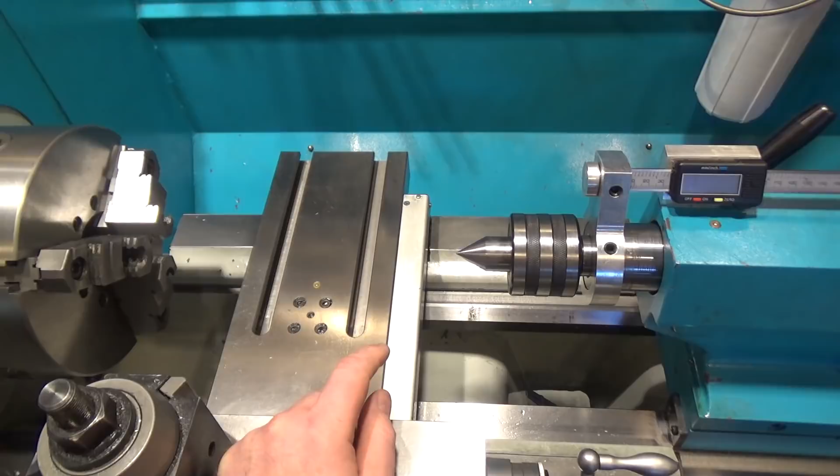Hi and welcome. A couple videos ago I was talking about a work holding problem where I wanted to turn a taper on the lathe, and in order to do that I'd have to take my tailstock and shift it off the center axis and then turn the part between centers. However, I noted that using a pointed live center, or dead center as the case may be, is not the best solution because it only makes contact at two points. A much better solution would be to make a ball center.

So I was going to make adapters, and I did make an attempt to make one. This isn't the live center I was trying to make an adapter for, but this live center has a 60-degree end tip angle, and that's the angle I made it for, and this fits very nicely. However, I made it for a different center.

So this is the live center I was actually making the adapter for, and I screwed up because I used my machinist protractor to measure this angle here, and it is 60 degrees, and I assumed that this angle back here would be 60 degrees as well, side to side. It turns out it's not. Looking at it, I thought, wow, it looks kind of funny, but maybe it's an optical illusion. This guy does rock a little bit because it's only touching at one point all the way around this rear section, because this is actually about 20 degrees.

But going about how I found out what this angle is might be interesting to you, so let me show you. So how did I find the angle of the center that I was interested in, that second compound angle that I can't measure directly with a machinist's protractor?

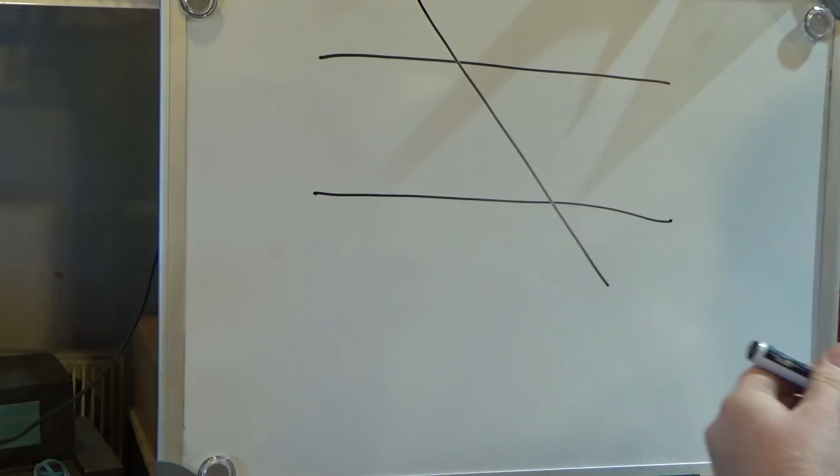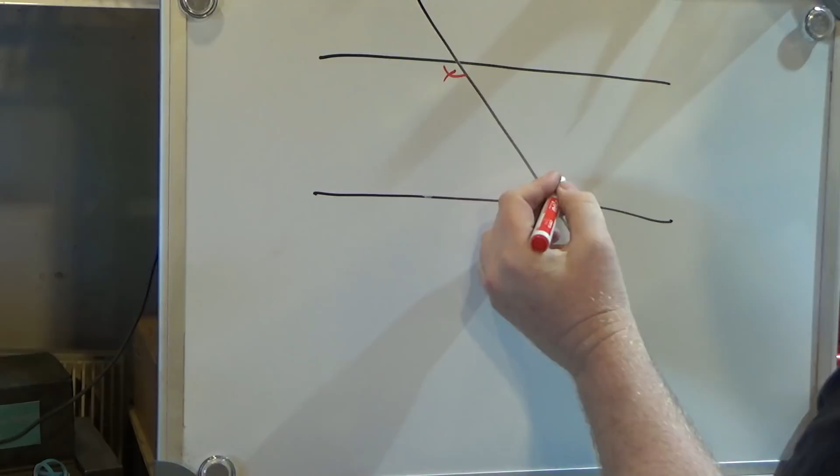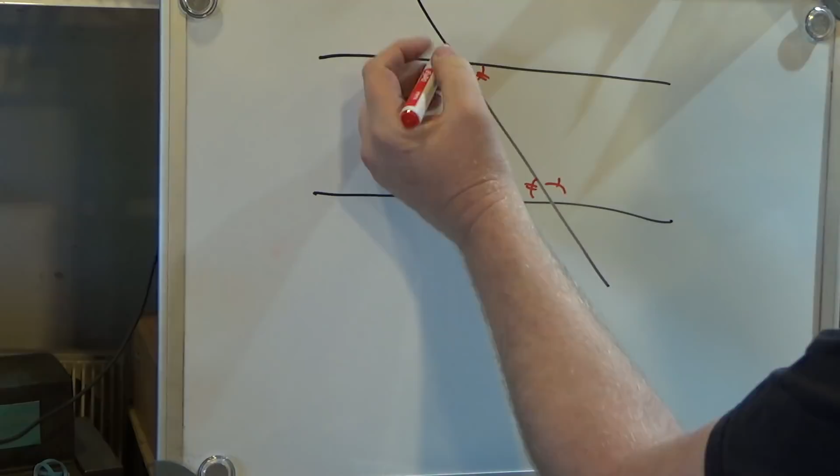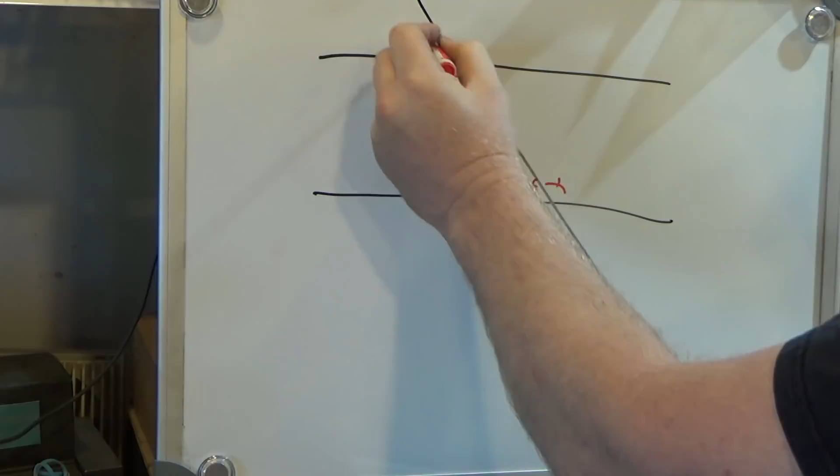The rules are as follows. If I have two parallel lines and a third line that intersects both lines, a couple things are true about these lines. Number one, this angle and this angle are equal, we'll call that number one. This angle and this angle are also equal - alternate angles are equal. It also says this angle is also equal to that by a different principle, because vertical angles are equal. So if you have two lines crossing each other, the angles on opposite sides are also equal, which would also make this angle equal to that angle, incidentally.

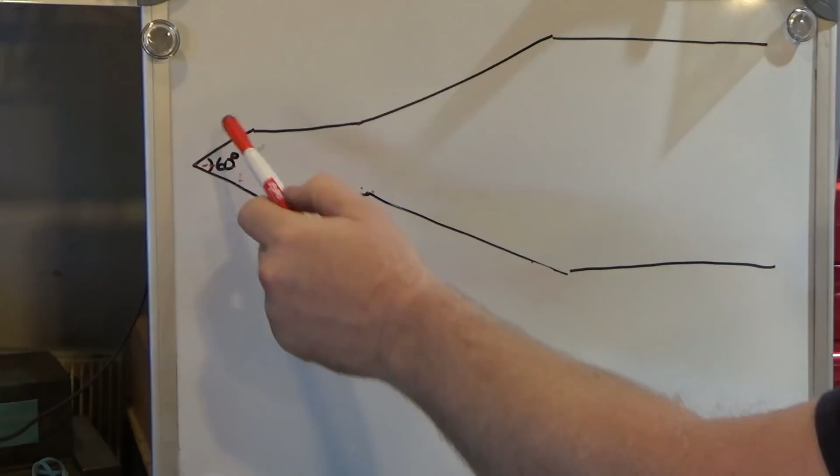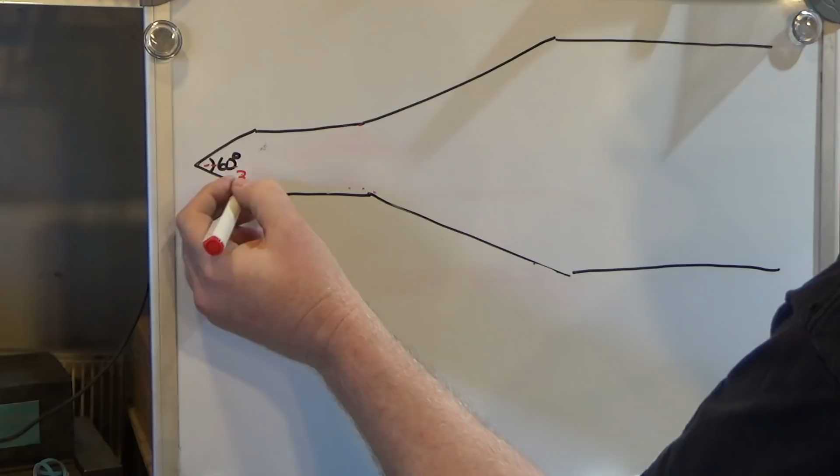This is a useful identity, and you'll see why. So I knew that the end of my live center, this is an exaggerated drawing of my live center, was 60 degrees, and I could measure that with my machinist protractor, and everything was great. I knew that half that angle was 30 degrees, and so I put my compound at 30 degrees and turned it, and everything was perfect.

I assumed this angle was the same. I was incorrect. It looked like it wasn't the same, but I thought, why would anyone do that? So I didn't measure - I was foolish. So we're interested in this angle.

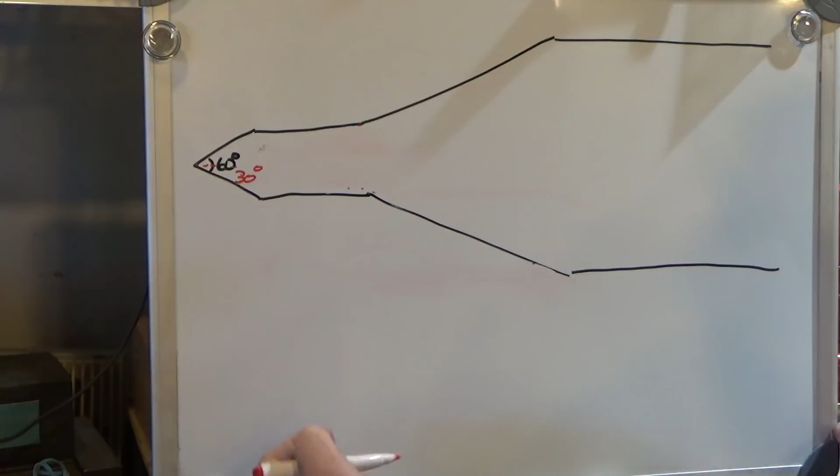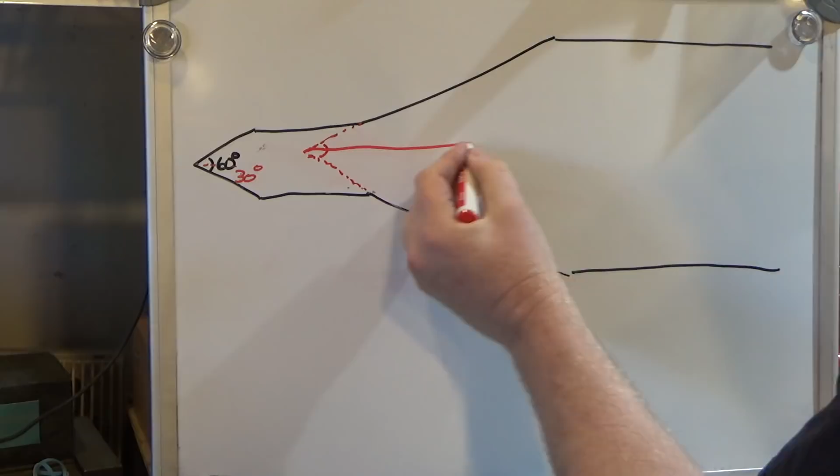So that angle is made by the extension of these two sides to where they intersect. And that angle here of interest is right here, right? Now in reality, we want half that angle. So I'm going to draw a line right down the center of the entire live center tip. So I'm interested in this angle right here, which is half of the total.

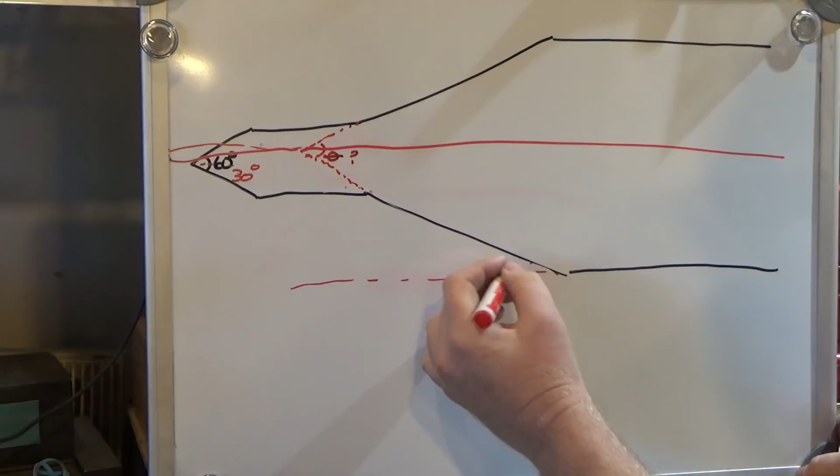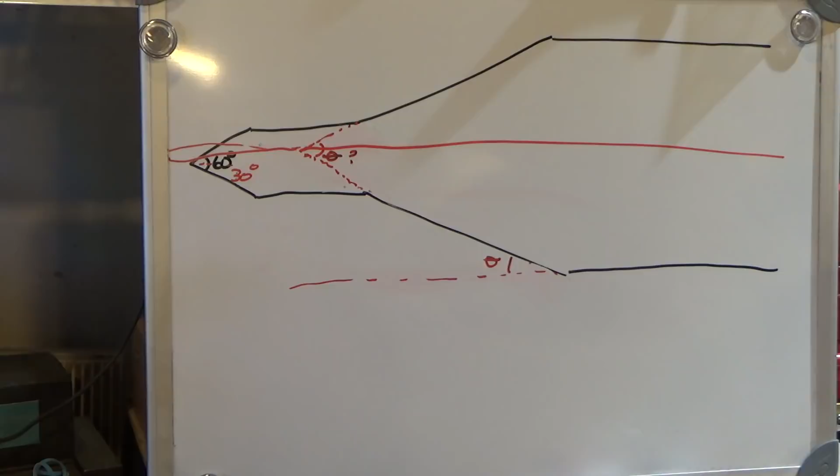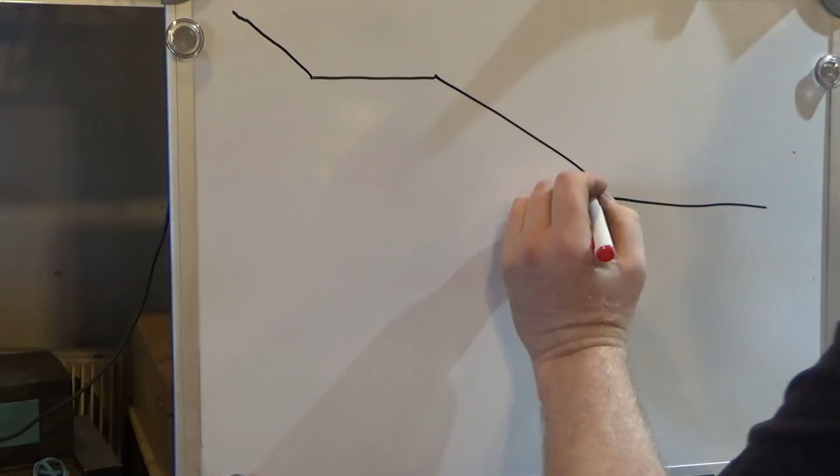If you notice, if I extend this line out here, these are two parallel lines, which makes this angle and this angle equal, which means now I can measure this angle and it will be the same. So how do I do that? I'm interested in measuring this angle right here with relationship to the horizontal, because that will give me half of my total angle of the upper section of my live center.

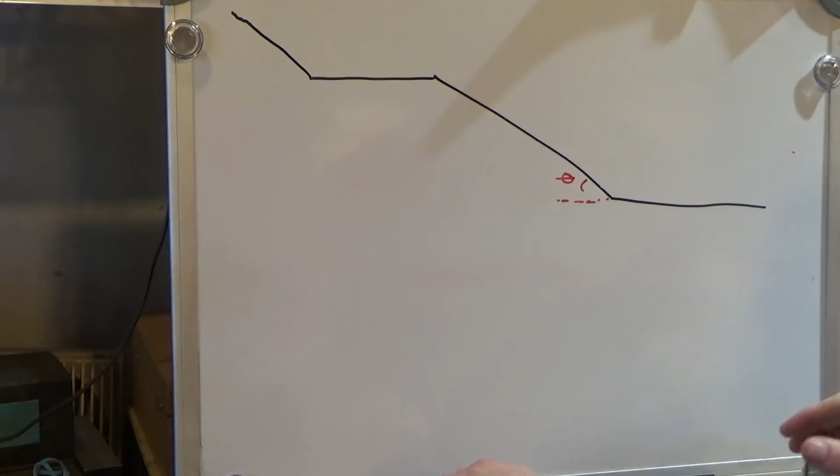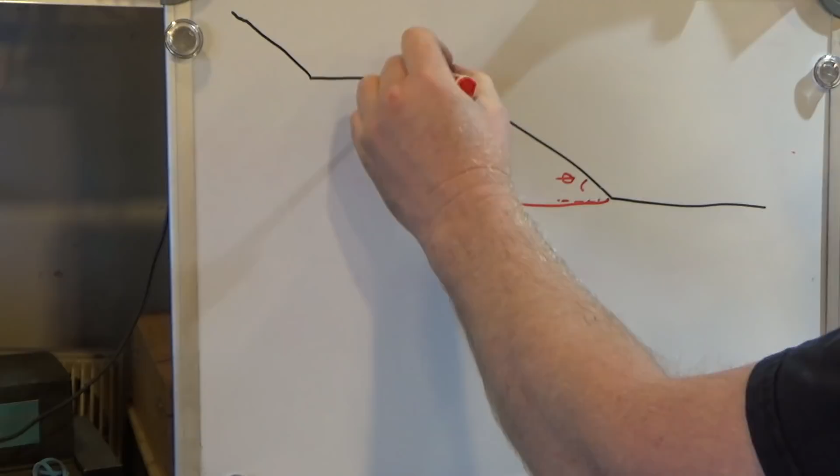So how do I measure that? Well, I noticed something - if I continue this parallel line out here that extends off the side of the center, and I drop a vertical from where it intersects the transition point, I have a right triangle. So if I were to take and put a measuring device to measure this change from here, height-wise, to here, and I knew this distance from here to here, I can use trigonometry to solve this problem, because this is a right triangle.

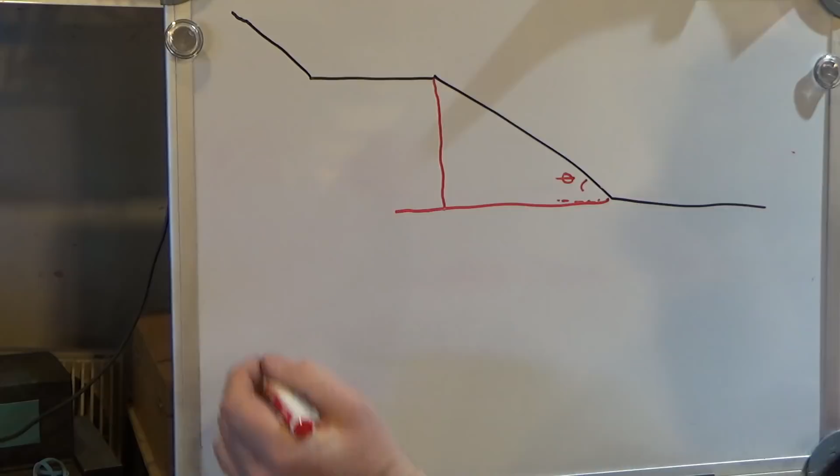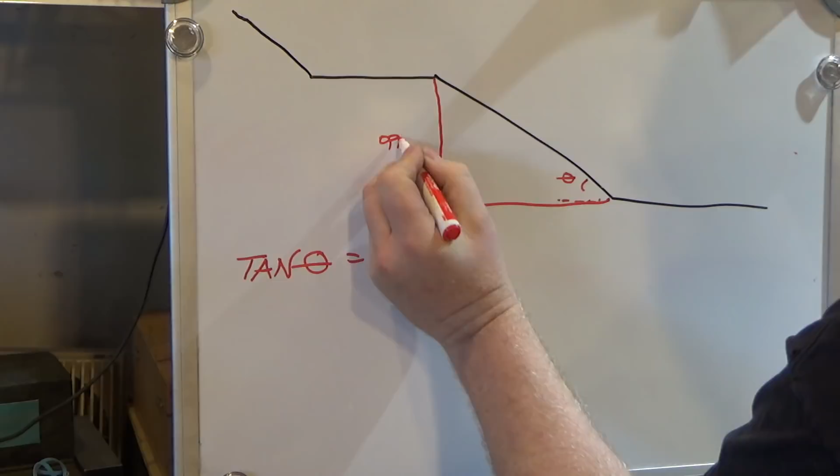And it turns out a useful relationship is that tangent of that angle is equal to the rise, or the opposite, over the adjacent - the ratio of those two sides.

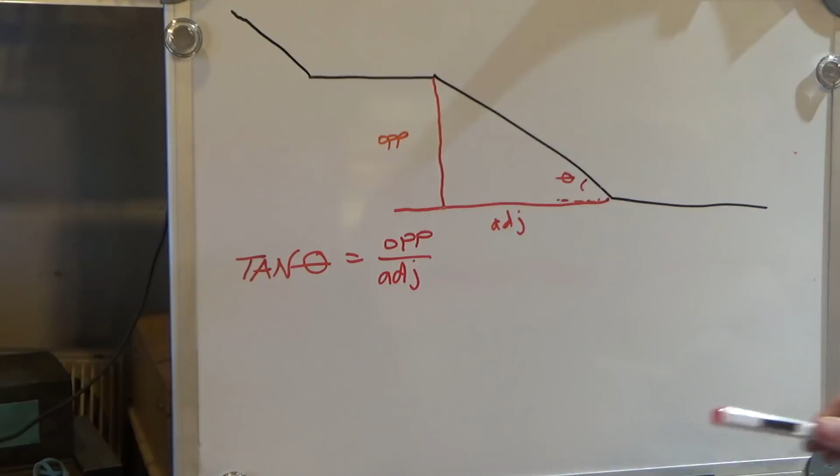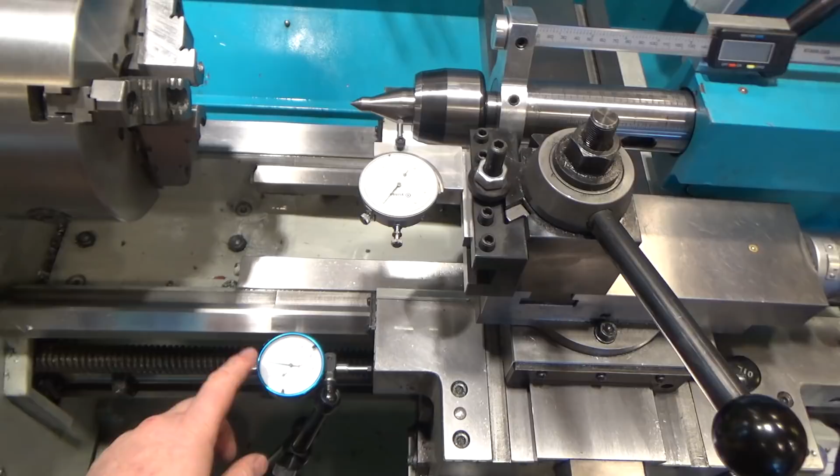So let's hop over to the lathe and I'll show you what I did. Here's the setup, and I changed it. I didn't originally do it this way, but I have a DRO on my lathe, so I didn't need an indicator on my longitudinal axis, but a lot of people don't, so this will work equally well. You put an indicator on the longitudinal axis, and an indicator on the radial axis, and after you zero this one, let's just zero it right here.

What you do is move a known distance horizontally, like 100 thousandths, 2, 3, 4, 5. So I moved over half an inch. I'm trying to get it exact because this is a very precision measurement. And then you look at the change in height over here, and you record those two values.

So now you've got your rise and your run, or your opposite and adjacent sides of the triangle. When I did it with the DRO, I tried to measure as far as I possibly could. I only went half an inch here because the way I preloaded the indicator, I could only get half an inch. But the truth is I did as much of this as I could, because the longer distance you go, the more the error averages out to a smaller value. So I was hoping for a larger move rather than a really tiny one. So I did 3/4 of an inch.

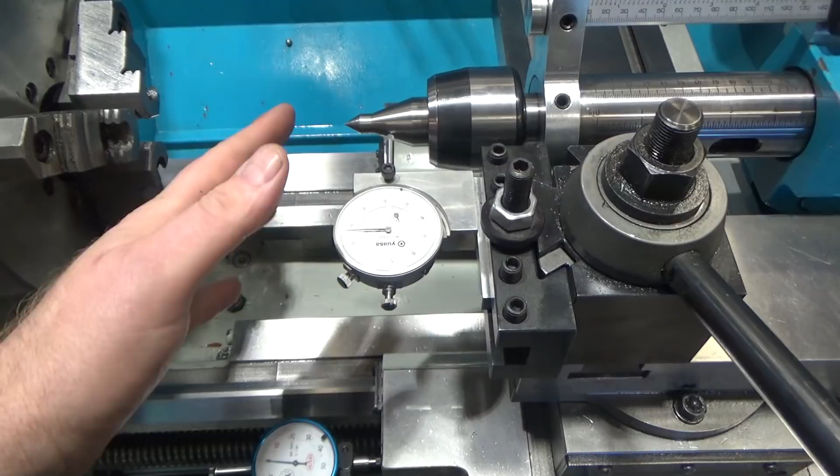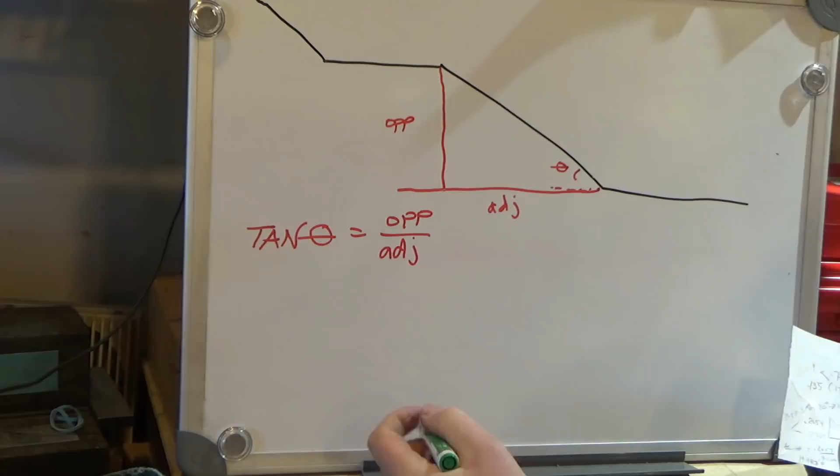Let's look at those numbers. Here are the numbers I got when running this test, and I did it several times. So for the height change, I got 0.2655. And for the distance, it was

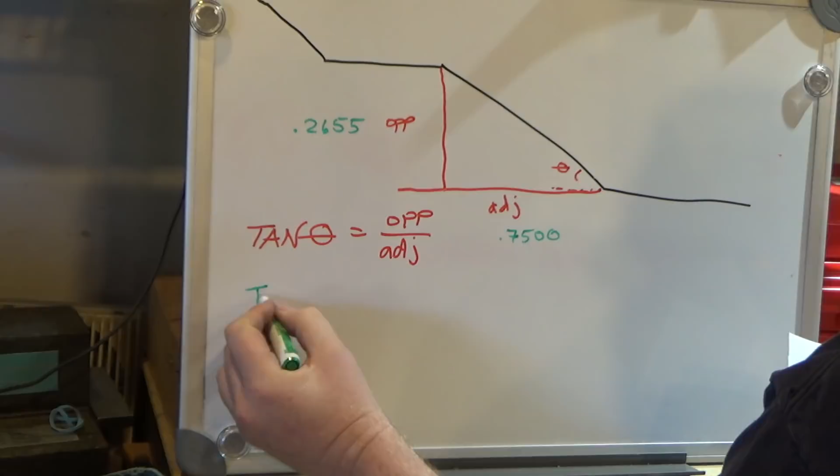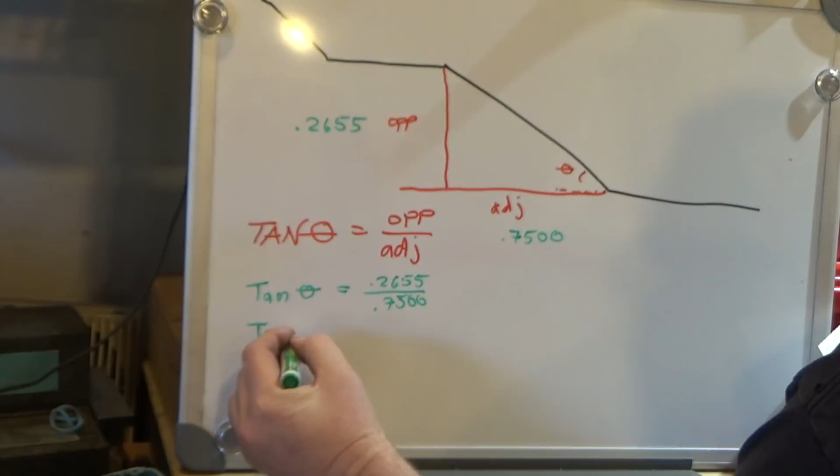0.7500. So tangent of the angle of interest is equal to 0.2655 over 0.7500. So to solve this, you take the tangent to the -1 of 0.2655 over 0.7500, and that gives you

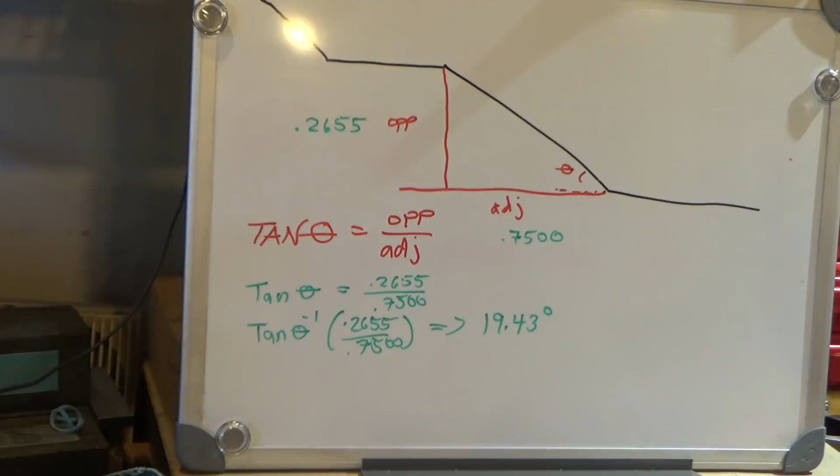19.49 degrees. Now, I looked at that and thought, who the heck would do that? Why, unless someone was freehanding it, wouldn't you just do an even 20 degrees?

So here's the only problem with this measurement technique: it ends up being extremely sensitive to these values. I'm taking it to 4 places here, which probably isn't reasonable because it's pretty hard to get those values to 4 places. It's doable, but it takes a lot of work.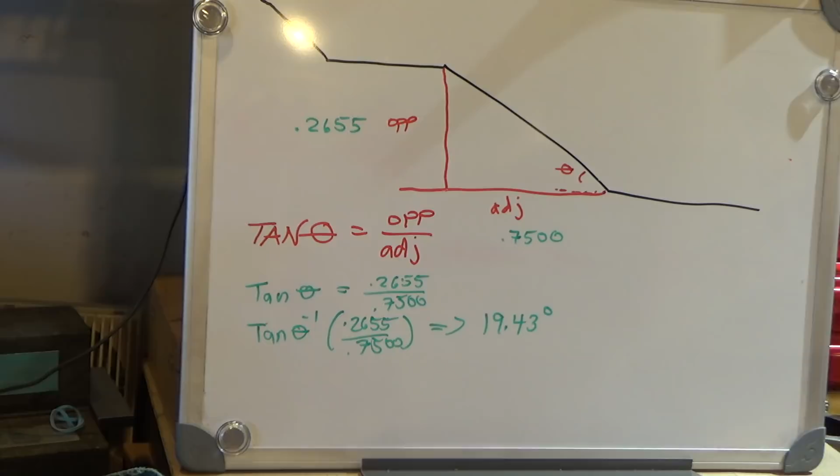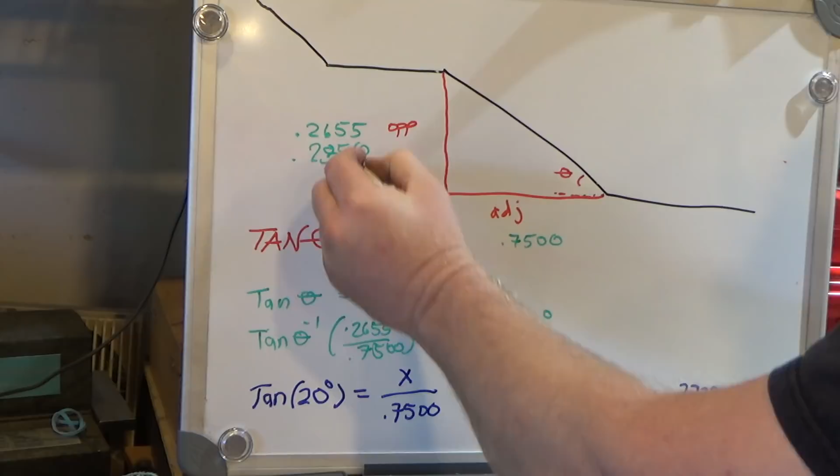So I tried it again using the indicators rather than the DRO, just to see if that would improve my accuracy. This distance went from 0.2655 to 0.2850, which is actually farther off from ideal than the DRO-based measurement. Possibly it's the way the indicator sits on the angle as well -- it's got a fairly big ball tip on it, and it might not be making equal contact the whole time, because there's also a little bit of damage to my live center.

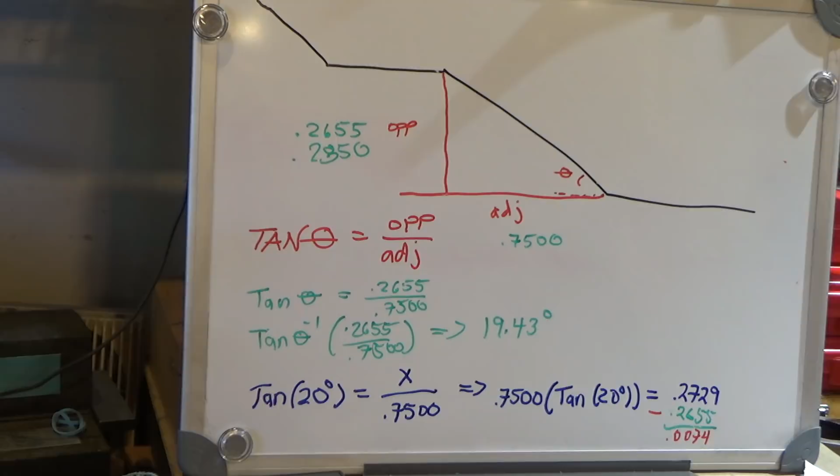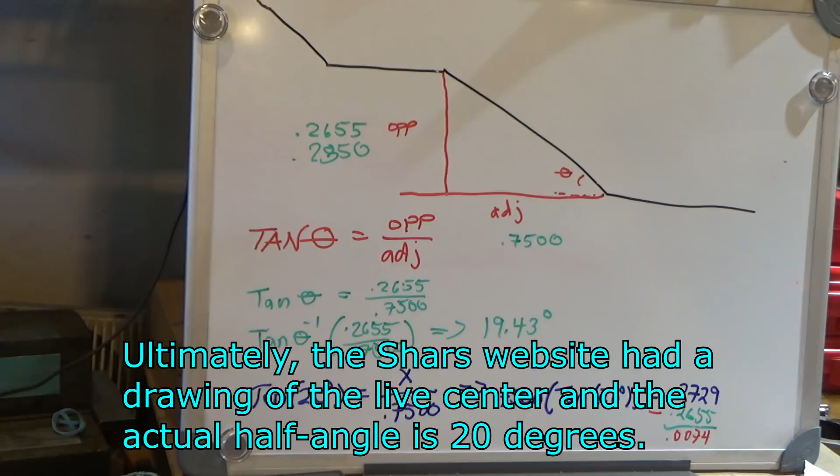So I'm not sure exactly where the error is, because this answer should be 0.2729, and I've tried it a bunch of times and I can't get that answer. So I guess it's important to say that this can only get you close unless you're exceptionally accurate in your measurements. For whatever reason, I can't get there from here.

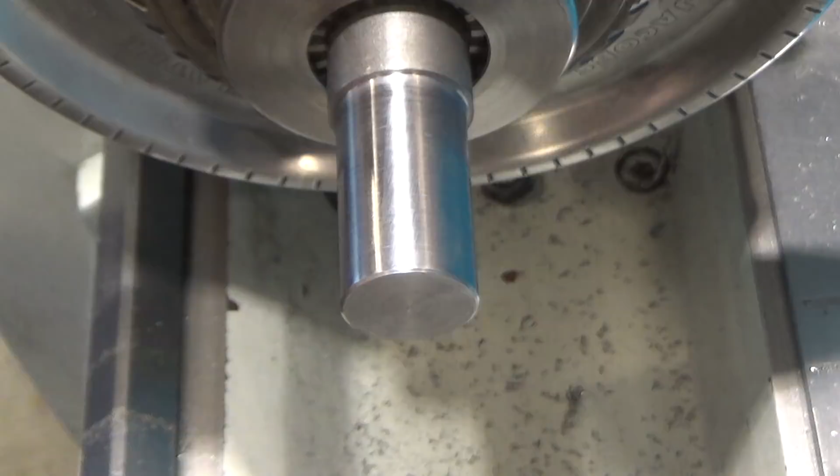So anyways, let's go over and make the part. I've come over here to the lathe, and I have a piece of stock loaded. It's 4130, and I started with raw stock that's 1 1/8 inch and reduced it down to 1 inch, and faced and chamfered it so we could start this project. I didn't think you needed to see the dimensioning of the stock.

Just one note is that this stock, this 4130, is chromoly, and the cutter leaves a terrible finish. So what I had to do is get it within a few thousandths, then file and sand to get this really beautiful finish it's got now.

Anyways, interesting to note -- before I even did this, I wasted a whole piece of stock trying a bunch of feeds and speeds, and no combination would yield me a good finish with the insert I was using, which incidentally was this Kennametal insert. The chip breaker would work, but big bites, little bites, big feed rates -- 14 thousandths per revolution with a small bite, like 25 thousandths depth of cut, 50 thousandths depth of cut, trying 100 thousandths depth of cut with a slightly slower feed rate -- nothing would yield a good finish.

Even 2 thousandths a revolution at 5 thousandths depth of cut would not create a good finish. So pretty much there was no way I was going to get a good finish out of this apparently. But you can get it to a really beautiful finish after the fact.

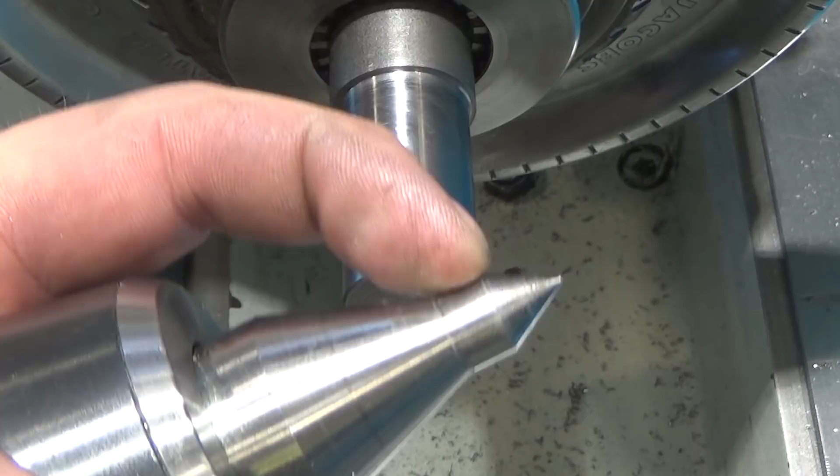Let's get started. First step, we're going to drill the center out to remove most of the stock so we can bore it to the proper dimension to fit this guy, my live center. This is 0.4 something, I don't have my drawing in front of me, and so we need to drill out for that. Then we're going to match this 20-degree angle by boring. So we're going to center drill.

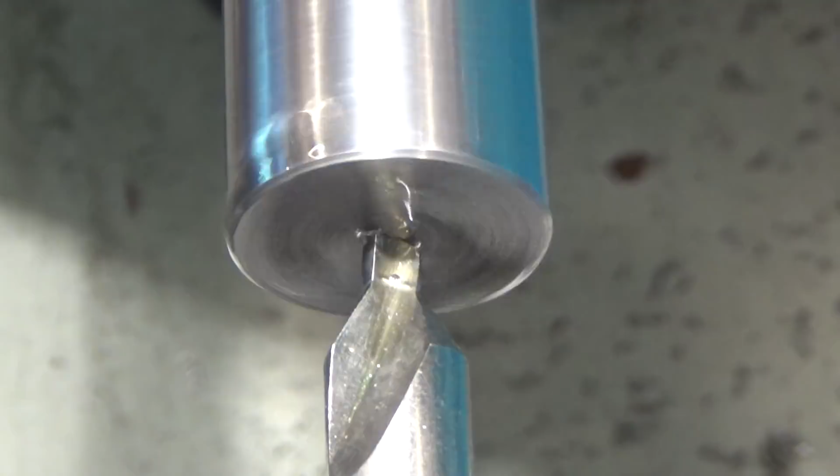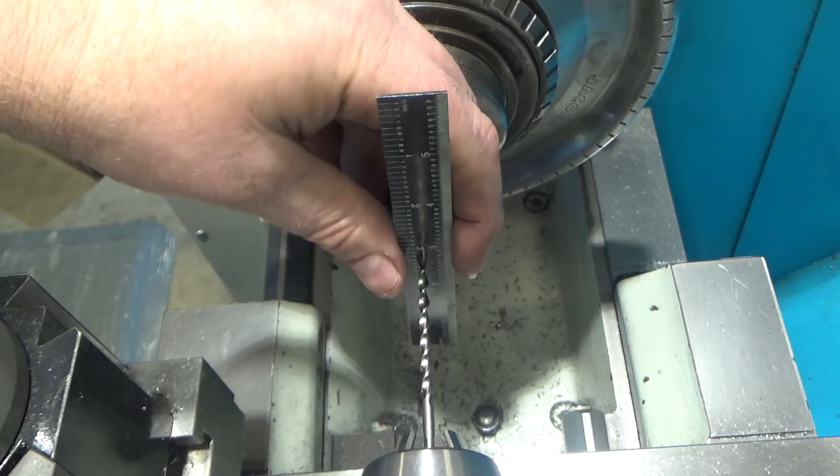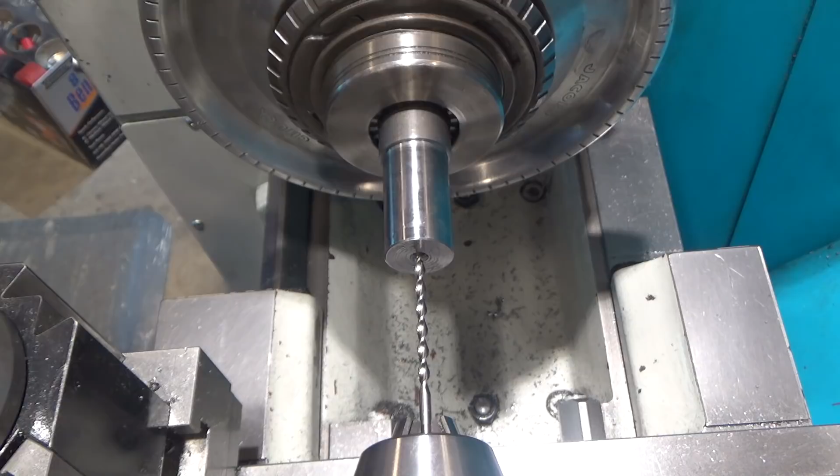To find the depth of my drill bit, I will first just gently let the drill bit touch my scale, then I will hit 0 on my DRO, a project I did earlier, and then I will go back in and move in 40 thousandths, which is the thickness of the scale, and set 0. Now the point of the drill bit will be right at the face of the part I'm working on. So now I can go in and...

drill the depth. So now we're going to go in 1.164 inches. This is a high helix drill bit, so I can get a pretty decent amount of depth before I have to retract it.

Just like before, I'm putting a scale in front of the tool I'm using to drill. In this case, I'm using a 3/8 end mill so I can get a flat bottomed hole. I will dial in the 40 thousandths, and I have my 0, and now I can just bore the bottom hole.

Another way to get a flat bottom hole would be to take a drill bit and grind the end flat, then just back relieve the cutting edges. This is a damaged drill bit I need to resharpen, but you can cut the end flat, back relieve it, and then you have a flat bottom drill that you can get a nice flat bottom in your holes with.

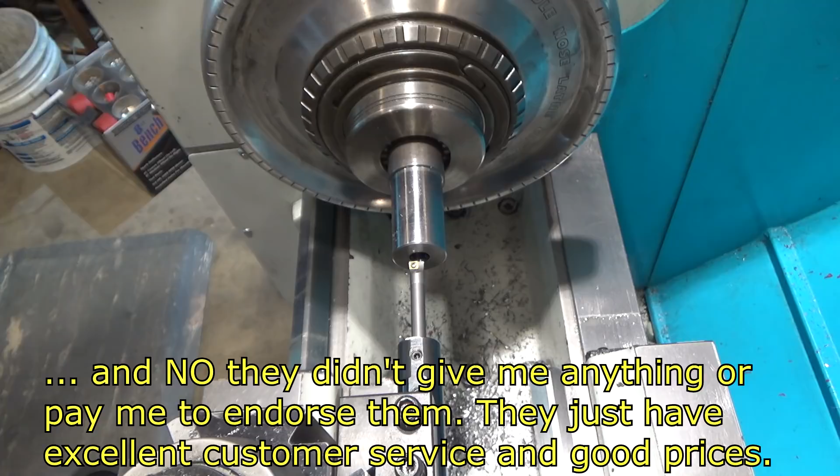So next we're going to bore out to 0.470. We're currently at 0.375, and I've got this tiny solid carbide boring bar - remind me to tell you about the company I got this from, because they're awesome for hobbyists like us, because they sell top brand surplus tooling at, well, Asian prices. So it lets us get really high quality tools that we couldn't ordinarily afford.

We're going to try a fairly light depth of cut just to see how this cutter will do. It's a huge amount of stick out for such a small cutter. So we're going to go for like 16 thousandths. Let's see how it does. Better than I expected. I set my 0 by taking the cutter all the way to the end and setting my 0 there, so I'm counting down to 0, which is easier.

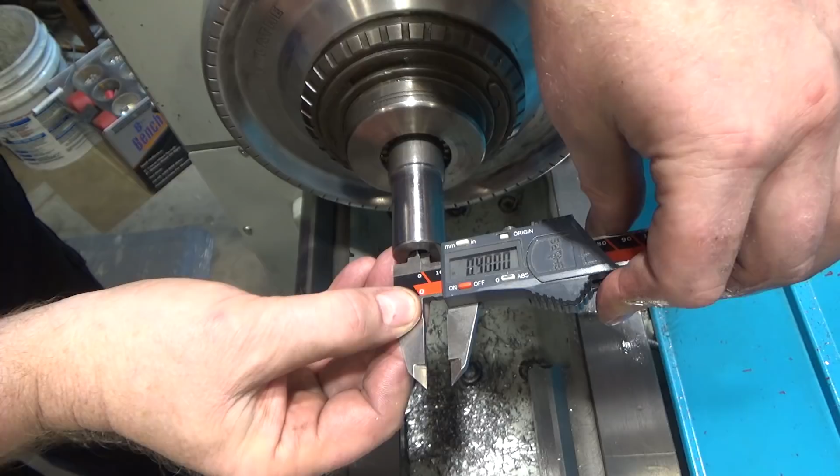When you're trying to measure the inside bore of a fairly small part, there are a couple ways to do it that I know of. I'm sure there are more, but the ways I'm familiar with, starting from least accurate to most accurate: one would be to get your calipers in there and wiggle back and forth and look for the smallest value. The next most accurate way would be to take the equivalent of a telescoping gauge, a small version of a split ball, put it inside, tighten it up, wiggle, extract, and measure with a pair of micrometers, which are at the other end of the dial, of course.

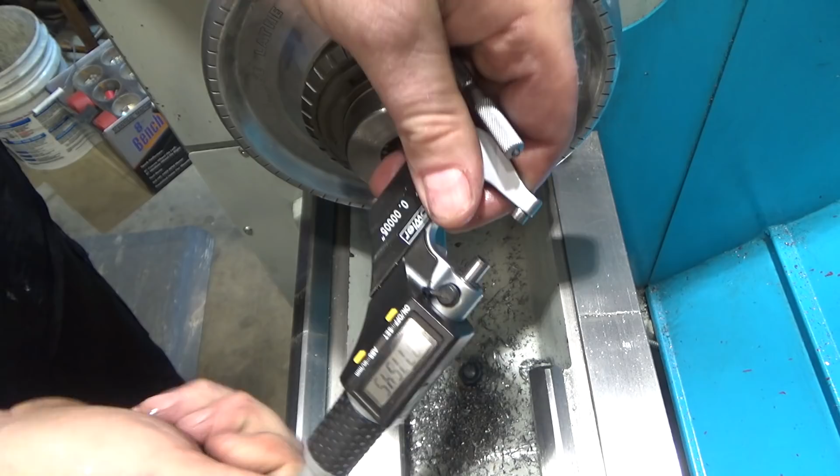Which are measuring a substantially larger value than I got on the calipers. And so, 0.4059. The final way is to use a pin gauge, the most accurate, and that's what I'm going to do. I'm going to use this until I get close, and then use a pin gauge to dial it in and get my final value. So I've got a little ways to go, I've got a few passes to go, and I'll bring you back when I get close.

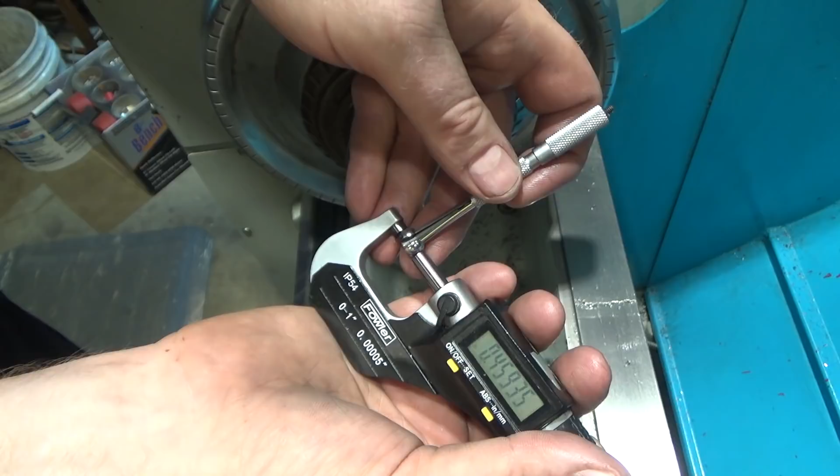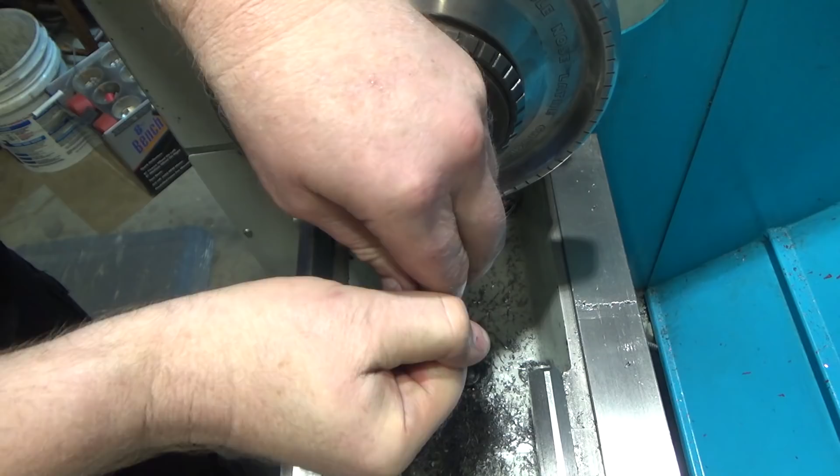Alright, so I've done a couple more passes off camera and tried to bring it within 10 thousandths, and here's 0.4593. Let's go grab some pin gauges and see how well they concur with that. So this pin here is 0.459, and it is a really snug fit. So we were actually pretty accurate, and I had to add a little lube so it didn't want to get stuck in there.

So we've got to walk in the last 10 thousandths, and I'll do that by measuring with pins. On one of my last passes here I was at 459, and I'm going to do a 6 thousandths pass to bring it close. One thing that's important is that the closer you get, the smaller the passes you need to make, because you don't want the boring bar to deflect as it's cutting.

Being carbide, it doesn't deflect very much, but it still does deflect some, so that's important to note. I took a 6 thousandths pass and it ended up at 66, so it's good to take small bites. I really do want to get it close. Instead of trying to go straight to 0.470, the value I need, I'm going to go to 0.469 and then bring it in with some sanding paper and lap it into the final dimension.

Next we're going to do the 20-degree bevel. To do that I need to set my compound to 20 degrees, and the way I did that first is I started roughly by setting the 20-degree mark on the scale on the side of it, but that's not accurate enough.

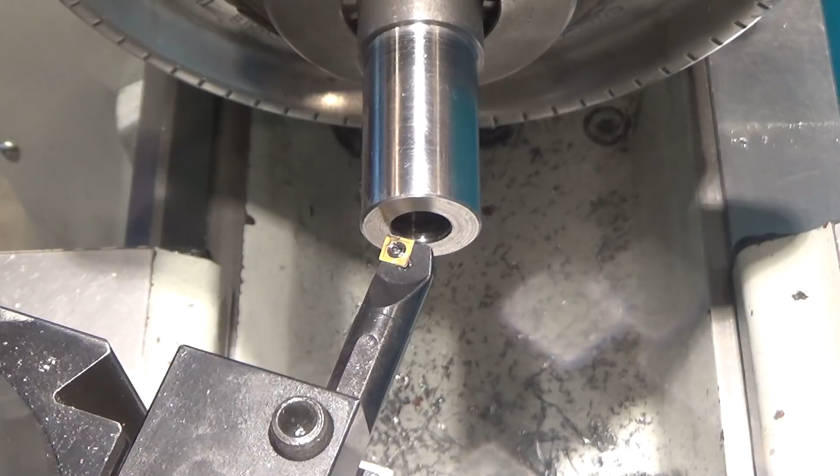So now we're set at 20 degrees, and we can cut the 20-degree bevel to match the live center's 20-degree point. We're ready to do some passes at 20 degrees, and I have locked the longitudinal lock on the lathe so that the only thing adjustable will be my cross slide, in and out, for finding 0 and choosing how big a bite I want to take, and the compound to take the bite itself.

Let's set speed — this is probably good, 440 RPM — and we're good to go. All right, let's take a really light pass. Each time I set my x-axis to 0 so I can pull out without scratching if I want to do that. Here's about a 25 thousandths pass.

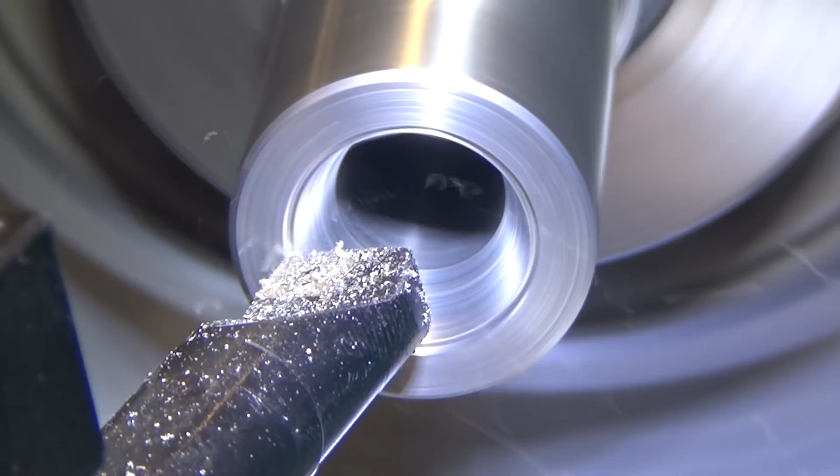Material finishes terribly. I'm going to try a spring pass and see if there was much deflection in the cutter taking a 25 thousandths depth of cut. Apparently there was a little bit, so what I'm going to do is keep taking spring passes until I get no material removed.

So I got the opening within about a thousandth, and then I took the rest off with sandpaper. You can see there is no play at all — that is a perfect fit. Now we just need to profile the outside and part it off, and we are good to go for the final part where we braze on the ball bearing.

Now I'm just going to put some decorative banding and a little profiling for appearance, then I'm going to part this guy off. I'm going to flip it around, and then I'm going to relieve it so that the ball bearing can get to the part and still let tools get around it. You'll see when I get there.

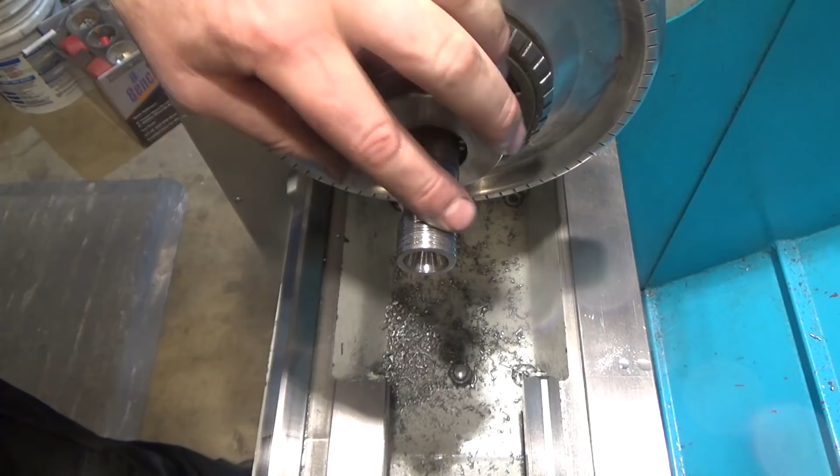Now, this particular collet, let me pull wide here, is a Jacobs collet, and it does a pretty good job of distributing the force, but still, it would have been smarter if I had held it first and then done the profile after, and then put the grooves in at the very end by grabbing on this part here, because this didn't take a lot of force at all. Anyways, live and learn, and I'm going to part this guy off now, and then we're going to flip it around and finish it.

So next up, we're going to just put a profile on this for relief and appearance. So we're just going to work it back until it looks like we've got enough space and still have room for the ball bearing point. Because the whole goal is to get this extra material out of the way of the ball bearing that will be mounted dead center there. That way tools can get in closer. So that's where we're headed.

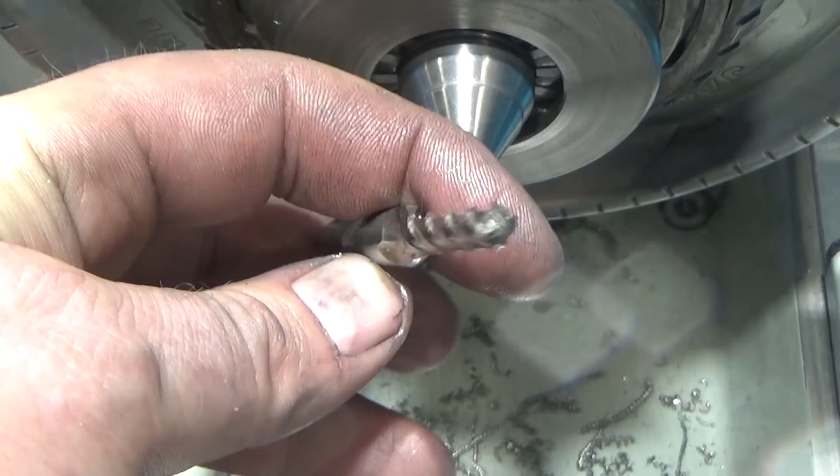I think we're good. I think I'm going to do a couple spring passes, see if I can clean this up, which I'm pretty sure I can't because this stuff sucks. The last step's going to be to take this ball end mill and put a little detent in the end of this that will be the same radius as the ball bearing I'm going to use. And the advantage of that is increasing the contact surface area of the ball bearing. Hopefully make it stronger. So we're going to take this really slowly. An awful lot of stick out there.

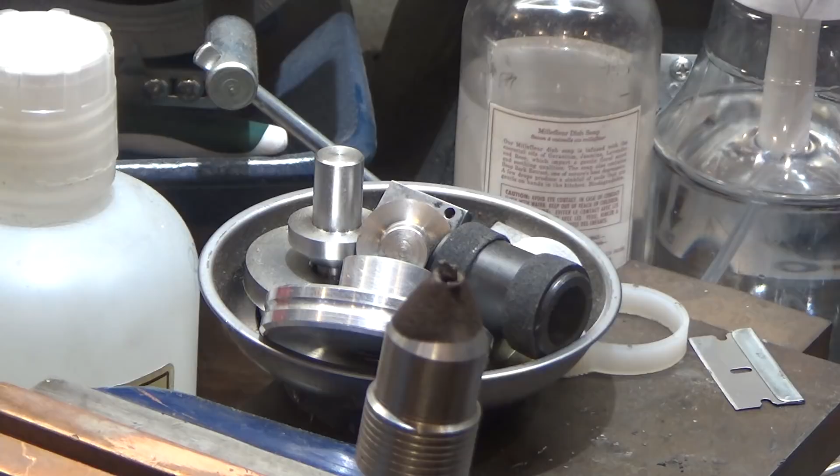So here's what the ball bearing will look like, and hopefully we'll silver solder it in place and it'll be strong enough. So now we're trying to get the balls brazed on or silver soldered onto the top of these fixtures. It's more challenging than I expected. I gotta tell you, that's incredibly hard. I had no idea it was going to be this hard.

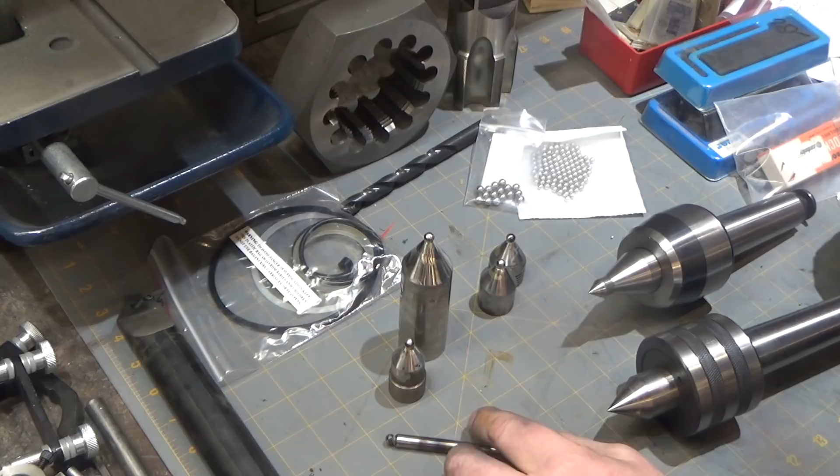Okay, so here's the final product. I figured if I was making one, I should make several, which is why this project took me a lot longer than I was expecting. It was a big learning process. The brazing process, never done silver soldering before, or silver brazing, whatever it actually ends up being, and it was very challenging. So the first one I did was this one, and it turned out so badly I had to actually return this on the lathe. Then I went to this piece of 5/16 stock,

and I got this one to work, and the trick seemed to be dip the end in flux, cut off a couple pieces of silver solder, bury them in the flux in the end, dip the ball bearing in flux, and then heat the base until it was glowing red and the silver solder was completely melted, and then bring the ball bearing slowly into the flame so it heated up, if you can hold on to the ball bearing and not have it shoot out, which it did pretty much every time. And then once you touch the pool of silver solder, it'll stick, and then you just continue heating and it'll settle in, especially since I created the 1/4 inch concave hole for it to fall into.

So these two guys are for 30 degree. This one goes in a chuck all by itself, and this guy goes on a 30 degree chuck and mates. It was my first one. It was a mistake where I thought this angle here was 30 degrees like the tip, not 20 degrees like it actually is. So I made this one, but it'll work perfectly for the 30 degree live center or 60 total angle. These two are for this guy. That one's not bad. This one's an absolute perfect fit. I was very careful the second time, so you can hear it suction off.